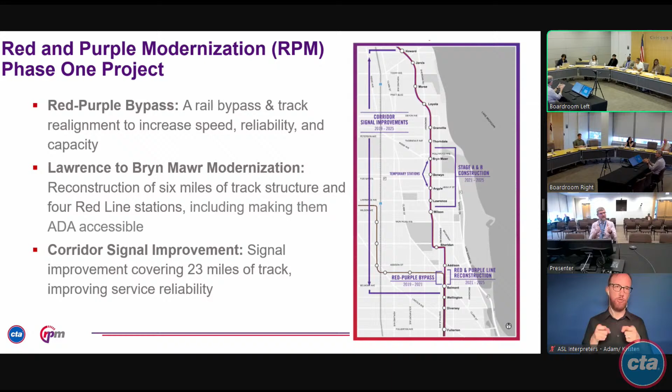They are exceptionally complicated to install, and even more complicated to design. It is a specialized field in the electrical mechanical world. This gives us 23 miles worth of modern signal system that is forward compatible. You hear a lot of people talk about positive train control, and this will allow us, as we potentially upgrade cars in the long term, to switch to a digital system that gives us a lot of those positive train controls, where we can precision stop trains on a dime versus the bigger blocks we currently work in today.

So we're almost there. After what has felt like a lifetime for many of us, we are seeing the finish line readily ahead of us.

We are currently finishing up those 4 stations I talked about opening up. We are seeing the 2 southbound tracks, which is what we call tracks 1 and 2. We are currently running on the 2 northbound tracks, which we call 3 and 4, and we put those in service 2 years ago. So we are in the process of finishing up that track structure. We look to cut that over with the new stations. We've just completed a bunch of work in the Clark Junction area, and we're really close to the end of the signal project as well.

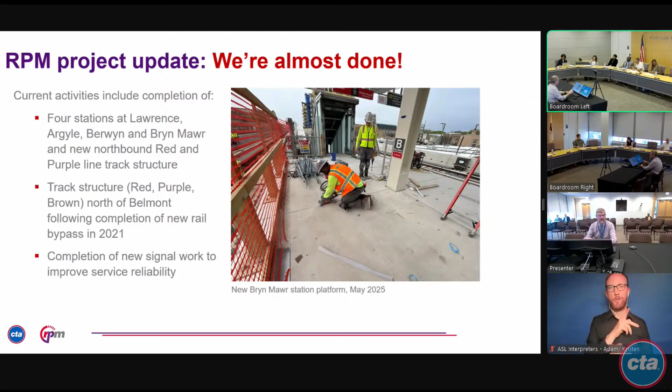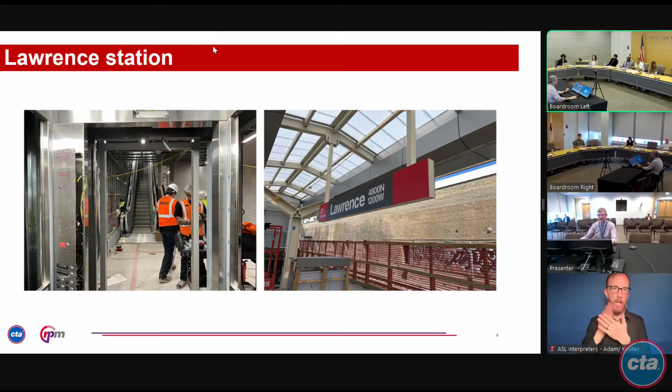You can see the name sign here. You can see the translucent canopy. You can see the finishes around the lighting there. That gives you a sense of that station.

Anyone that remembers the historical station, there used to be a giant Asia on Argyle sign that overlapped the street, that came down to make way for the wider structure. This is a modernization symbol kind of to that.

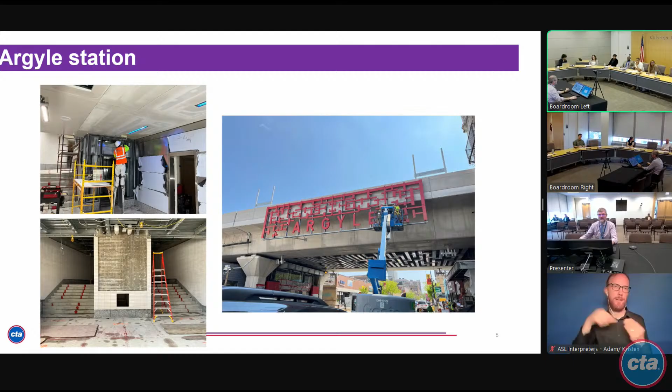It also has a more distinctive red finish on the exterior, which is different than all the other stations. All 4 of the stations are very distinctively different, and they're representative of these micro communities in this corridor. So even though it's only like a 1.5 mile corridor, there are very distinctive micro communities that have very strong, different opinions about those aspects in their neighborhoods, which has been interesting to see develop in a community process.

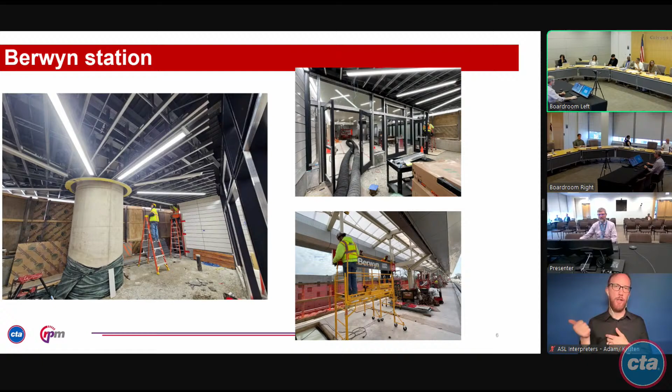As I mentioned before, Bryn Mawr is by far the farthest along of all of them. Here you see the almost finished stations. I was out there yesterday, and where that gap is in the shiny, clean terrazzo floor is actually fare equipment. You know, you're a bit of a transit geek when you walk into a station, you see a turnstile going in, and you're like, oh my God, it's a turnstile!

But it is that sense of finish there, right? That is that planted flag moment. So it's a turnstile, right? Yep, and I went back to it - I don't know if any of you have had the privilege of meeting Graham Garfield. Graham Garfield works for Chicago Transit Authority, but he is one of the foremost knowledgeable people on the CTA and its history in the world, and by definition, the purest of transit geeks. He and I share an office up at RPM, and I came back and said, hey, I was just at Bryn Mawr. He's like, did you see the turnstile? I was like, my guy, you know?

But yeah, so Bryn Mawr is by far one of the farthest along. It has a very distinctive exterior. If you remember the old Bryn Mawr Station, it had these discrete ornamental terracotta columns on the outside of the station - there were like 3 of them that the doors surrounded around. It was part of the original design there.

And we carry a representation of that historical element forward. It was really important, again, in this micro community conversation, that history of that - it's a very old portion of the city. You've got this connection to the Edgewater Hotel down the block, right? They wanted to keep some of that historical sense of that tie-in, so it has a little different facade than the other ones.

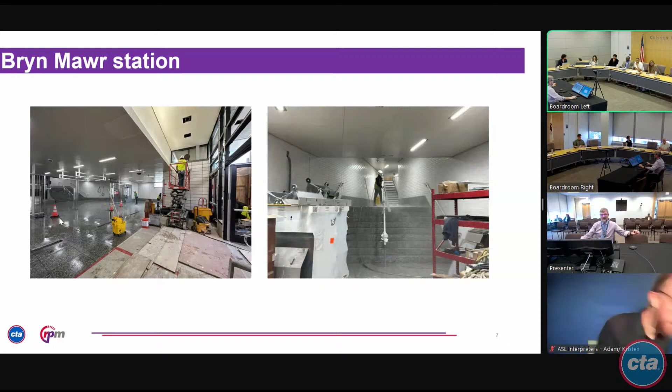So it is a big moment to see these coming out, to really see them come to finishes, see real stations, and we're really excited to see this and celebrate this later this summer. And then I talked a little bit about this earlier.

We had a little potluck and took a moment to recognize probably what was one of the most complicated milestones in this project. As I was talking to our board earlier this week about this, my team was certainly insurmountably challenged by this and rose to that challenge and met it. I give them credit and beyond credit. I give our contractor a ton of credit.

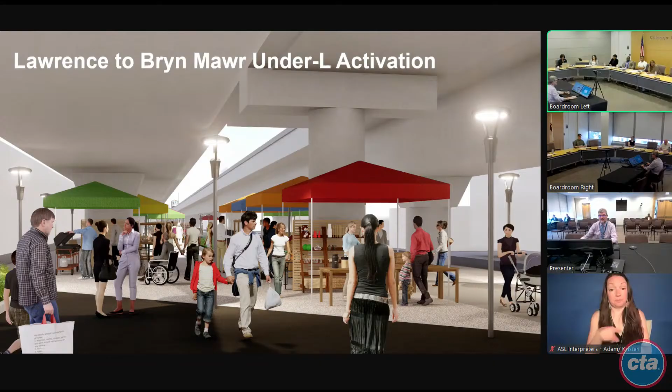I think I actually have a slide on that. So here's what I just talked about. We had this ugly old embankment there that was just going to keep that space enclosed, and it's really something that's kept that community divided for years. It kept it dark, kept it enclosed, but now you can see the difference just having the wall gone, how bright and airy and open that is.

It was astonishing the first time I went by there after we took down the old viaduct, the last piece, and just had the wall gone. You had that all open and it was like, oh my God, how much light is here? How much space is here now is amazing.

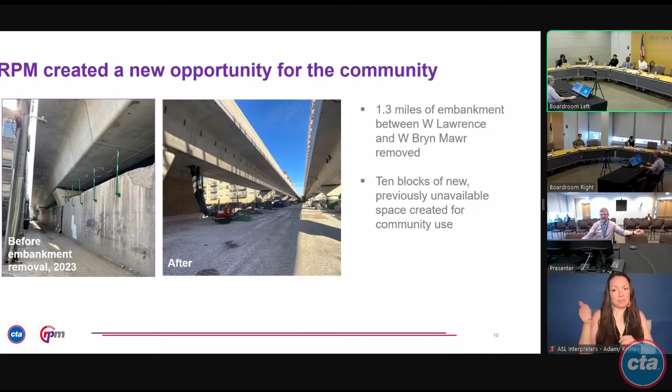So we have 10 blocks of new, previously unavailable space that we had to go out to community and program. We started in January '24 and did something we don't often have the privilege of doing: going to them and saying, we don't know what to do, what do you want? They went, what do you mean? Tell us what you want.

We have no great idea, we just want to make this space available. We want to understand block by block what you like, what you don't like. Do you want parking? Do you not want parking? Do you want water features? Do you want play spaces? Whatever idea we've got, let's get it on the table.

We had rooms surrounded in boards. There were over 500 people at these community meetings, and we gave them stickers and they went around and voted on dog parks, continuous pathways, parking, gym equipment. Then we came back in May of '24 and said, okay, you went out and we collected all this information from you of everything you liked, and here were the themes we heard.

We asked about color palettes. You like the orange, sand, brown color palettes versus the bright greens and blue color palettes. And overwhelmingly it was, we want a continuous path. That was number one, without a doubt, what we want. And then beyond that, it was all these other little things in microbursts.

So we came out with this big program of concepts and development block by block, and it was really densely populated. And then they went, oh my God, that's way too much stuff. You've taken way too much information from us now and we need to hold that down.

So we had a second round of public meetings in May with another 300 or 400 people opining on these concept designs and programs and what were really the most desirable features. Then we came out in February of this year with the final rendition, the final plan we took forward and authorized our design builder to execute. The board took action on it in March, after these community meetings.

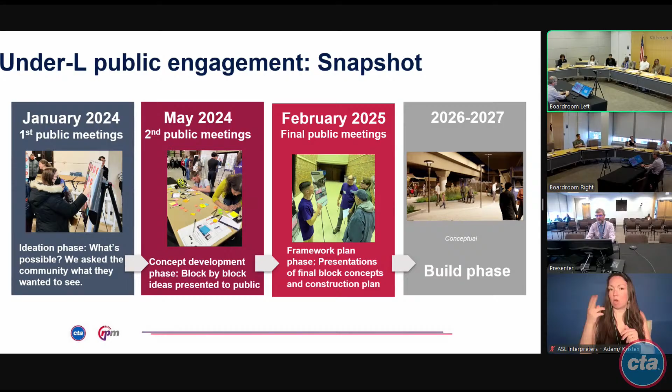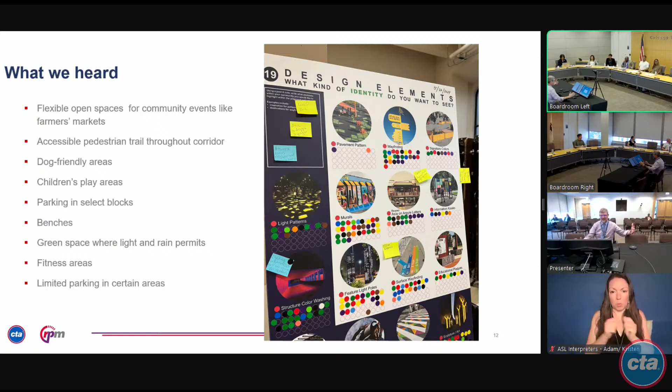Here's a little bit more of what we heard. You can see some examples of these boards and all the dots and things that people liked or didn't like, and how they weighed into them. And here are a couple of the images.

One of the things we walked away with is we want a space that can be used and activated constantly. If you build too many fixed fixtures there, we can't evolve with it, we can't do festivals. We want open space, because we're a very dense, heavily built neighborhood. This is the prime world of ETOD; we want high rises, we want all those things, but that means we have limitations on where we can do this other open space. So having the ability to have a food truck parade one weekend with the SSAs, it's a big deal.

But we also want destination spaces, right? Because now we've got this tie-in feature, this continuous path, we don't need a dog park every block. As long as there's a dog park somewhere in this path that the path gets you to, then you've kind of met the spirit of what we want out of that.

So there's a bunch of little tie-in points. There's a dog park scattered here, a kids park scattered there, a couple open activatable spaces for markets, the ability to have an exercise area here, and support for Lunar New Year activities, which is really popular. It comes straight through Argyle there, so you can have festival activities here.

And then as you get further down into these denser business market areas, there is some availability for short-term parking, because there is no real on-street parking, and then you get into all these other challenges. So you can turn over some meter parking there to support small businesses.

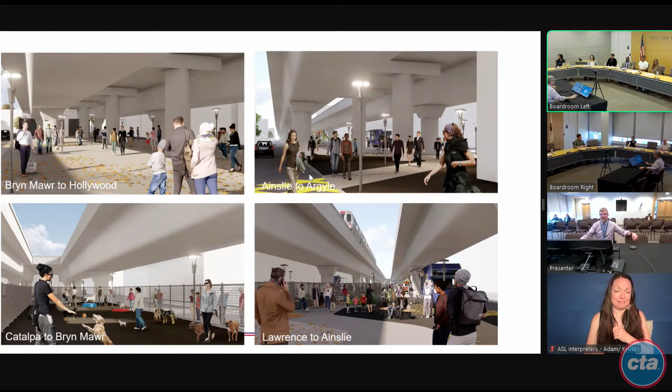It was really interesting to see this whole process evolve, to see the community input change. It's really exciting. We have started the design for the fullness of design beyond the concept at this point. We expect to break ground on this portion of the project in '26, and it should be completed entirely by the end of '26. So it's a pretty big, significant milestone that we're excited to see unfold.

So that's what I got for you. That gives you a sense of what Berwyn looked like way back in the heyday and how dark and low that viaduct was. We were blessed that they built this railroad for freight railroad traffic that was significantly heavier than us, so it was able to take a beating for a very, very long time.

Wow, thank you. This was such a great presentation, and just a really uplifting story around every element of that was really exciting to hear. I was geeking out with you, excited to hear about the turnstiles being installed. But this is really fantastic, and I look forward to going up there and seeing it myself when it's open. I don't have any questions, I'm just sharing my excitement about it and I look forward to checking it out.

Great, we'll take questions and comments from other members of CAB. Thorndale to Howard—is there any guess when that might happen?

I was actually in a meeting last night about RPM future phases. Our planning department has had a series of community meetings, I think last year, where we were out up and down the areas on either side of phase one. They started taking feedback about what they like about it, what we've done, what we don't like, and what we want to see as prioritizations. They've been putting together cost estimates and sharpening their pencils with modern dollars and design concepts. I understand from the meeting last night that by the end of this year, they'll be coming out with thoughts around timelines and next packaging of phasing. It's really about what is the next group we try to get into the federal process.

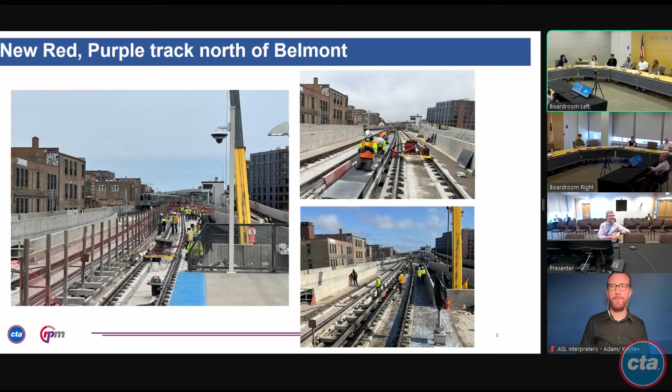Any other questions, comments, or recommendations to the board related to RPM that you may need insight from Bill Mooney on? Oh, I'm sorry, I didn't know you were - I had a call right when the meeting started, so I'm sorry I couldn't say present. I am here and present now.

I had a question - first, thank you so much for the presentation. I can feel your energy and passion, and it was very interesting to learn more about the stop. I did have a question about the diversity spending goals - I don't know if you can talk about those numbers or strategies to get minority vendor outreach to secure those contracts.

Yeah, I'm glad to touch on it a little bit. Usually when I do this I have my partner in crime, Juan Pablo, who does those slides every month, but it is a relationship partner. So we did a bunch of things with RPM when we procured this contract that were historically different than what we did on a lot of other projects. We have a construction goal of DBE participation.

It is 22% - I've got a couple numbers kicking around in my head between projects, but I think it's 22% overall as a goal. Then there is also an apprentice workforce goal, an EDA requirement workforce goal, and a WIOA workforce goal. Walsh-Fluor, the design builder on the project, is on target to meet or exceed all the goals in relationship to the project at this point. It looks like for workforce they'll meet those numbers, and for DBE they will probably exceed a little bit.